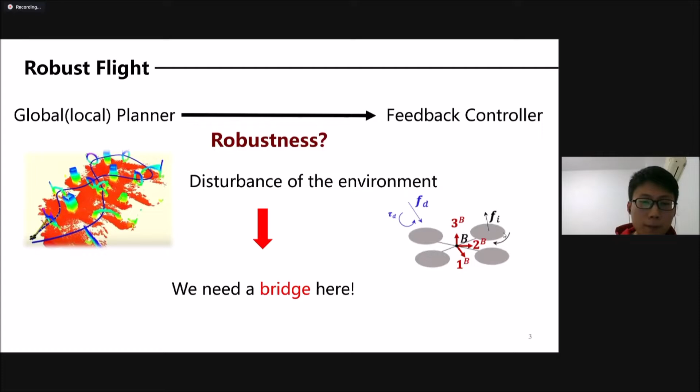However, the planner and controller of a quadrotor are mostly independently designed, making it hard to tune the joint performance under disturbance of the environment, such as wind. So there's a gap between the planner and the controller. To bridge this gap, we propose an efficient receding horizon, local adaptive low-level planner as the middle layer between our original planner and controller. There are 3 main features of our method. Firstly, our method balances tracking accuracy and traveling progress naturally with these disturbances. Secondly, corridor and terminal speed constraints guarantee safety and feasibility. And the third feature is the quadratic programming formulation with less than 5 milliseconds onboard solving time. This makes it run real time on board.

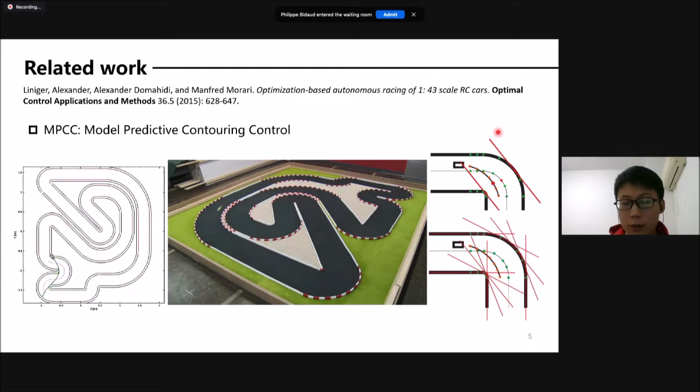Our method is inspired by this work, an application of MPCC as the planner for miniature car racing. The safety constraints are established by modeling linear functions from the boundary of the racing track, just like this. However, such constraints are not directly available for quadrotors in unstructured environments. Now let's see our problem formulation. Given a global reference trajectory, here P(t), we design a retiming function t(tau) to map the original time to the new time variable tau. Then the derivative of t indicates the traveling progress. When it's greater than 1, the drone travels faster than the reference trajectory. When it's less than 1, it means the opposite. We also designed the adjusted local trajectory S(tau). Then the tracking error is defined as the distance between P and S. The objective is to trade off the tracking error and the traveling progress under the safety constraints, which will be introduced later.

After discretization and linearization, we formulate the problem as follows: a typical path following MPC with a retiming variable theta. We model the system as a third-order integrator model. The states are given by x, y, z, theta, and their first and second-order derivatives, v and a. The input is given by jerk, the third-order derivatives of x, y, z, theta. They are discretized by delta t with predictive horizon length n. Thus, the optimization problem turns into receding horizon MPC with a linear state transfer equation here. The objective is nonlinear because of the term P(theta). Thanks to the receding horizon framework, we linearize this term around the optimized result in the last horizon. Thus, the objective function can be represented as quadratic.

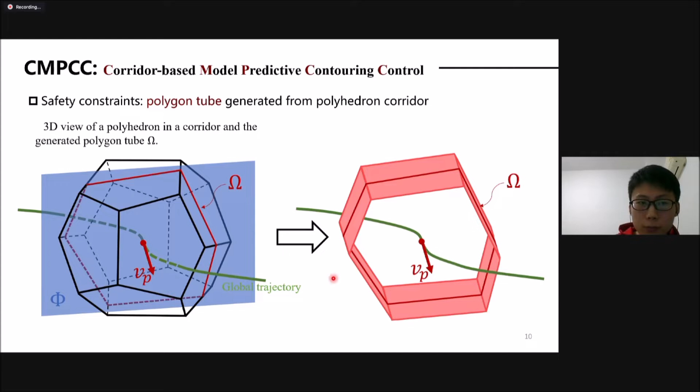And now let's see the safety constraints. A safe flight corridor is a series of connected polyhedrons representing the safe area around obstacles, which is generated during global planning. Leveraging the safe flight corridor, we generate a polygon tube for each state during optimization. The polygon tube is generated as the intersection between the corridor and the normal plane of each state of the global trajectory. And each state at an optimizing time step corresponds to a single polygon tube. Yeah, this is our safety constraints.

Besides, considering the shortsightedness of the limited horizon, we set a terminal speed constraint. Restricting the terminal speed ensures feasibility while significantly shortening the planning horizon.

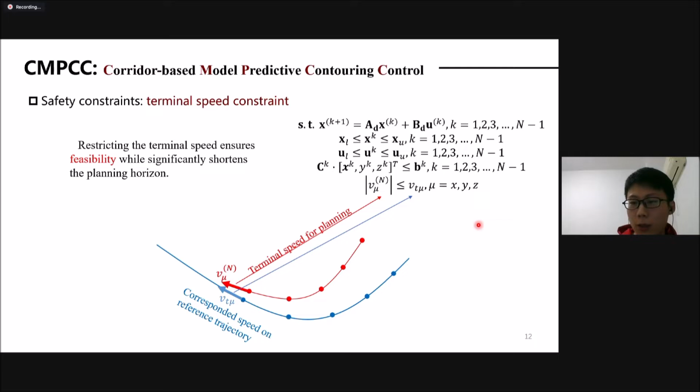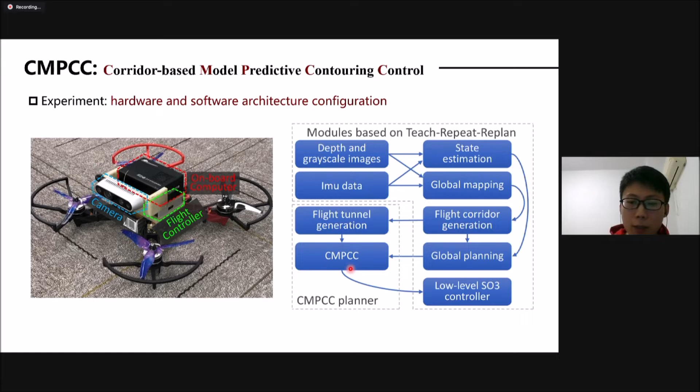Here is the hardware and software architecture configuration of our experiment. We use a self-developed quadrotor with an Intel RealSense D435 stereo camera, and a DJI N3 flight controller for state estimation. All modules run solely on a DJI Manifold 2C onboard computer, and our system inherits the localization, mapping, and global planning from the Teach-Repeat-Replan system.

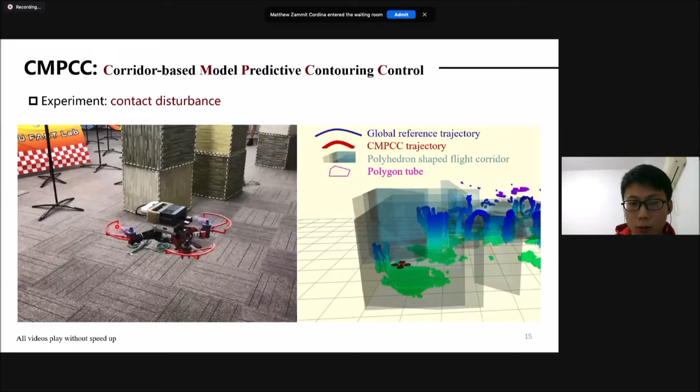And we also apply challenging force disturbance to the drone to test the performance of the proposed CMPCC planner. And here is the top-down view of the experiment. We can see the performance of our planner.

Okay, now let's see the spatial and time profile of the circumstance under contact disturbance. The red line denotes the trajectory of CMPCC. The blue one denotes the global reference trajectory, and the magenta one denotes the trajectory without disturbance. From the left, we can see the deviation occurs near the hit position, but the CMPCC planner soon converges to

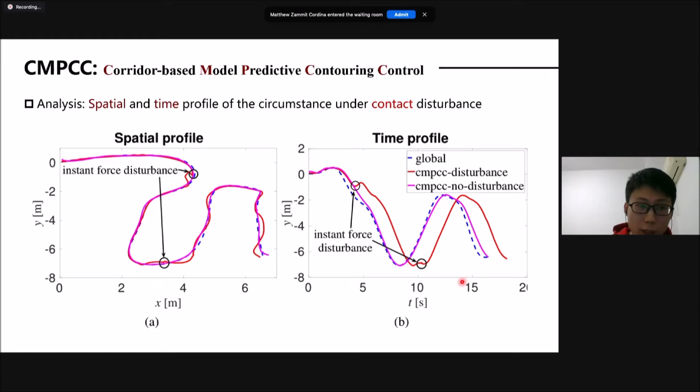the global one. From the time profile, we can see that the instant force disturbance changes the temporal distribution of the optimal trajectory, resulting in the delay of the CMPCC trajectory relative to the one without disturbance and the global trajectory. And here are some more tests. This test shows the robustness of our system.

Okay, thanks for listening. Any questions? Thank you very much. The paper is now open for discussion. Questions? Oh, yeah? Yes. May we have a mic for... Thank you for this very interesting presentation.

My question is, what is the advantage of this middle-level contour MPC over letting the MPC generate its own trajectory by giving all the constraints? I mean, one MPC that actually works as a controller and also as a planner, given all the constraints. Is there an apparent advantage? I think your question is about the corridor constraints. Is there any advantage of the corridor constraints? Is that right?

My question is, is there any advantage of this architecture? You have a global trajectory, then you have this contour controller, then you have a low-level controller. Instead of this, we can also have an MPC controller that can directly generate its own trajectory. So what is the advantage of your architecture over this?

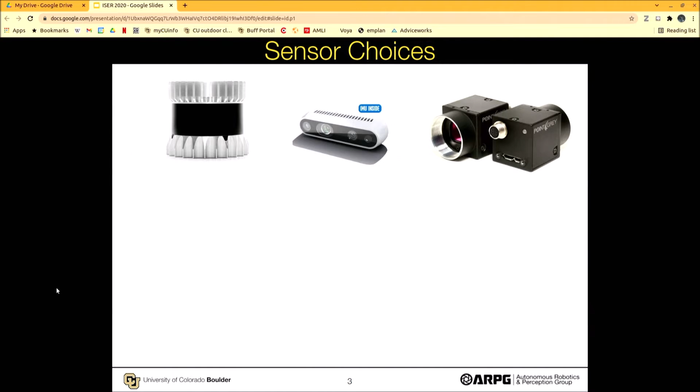LiDAR and vision are commonly employed in achieving localization, mapping, and higher level perception problems. Depth cameras, GPS, and inertial measurement units are quite popular as well, and these work fantastically when conditions are favorable for them, i.e. when the air is clear, when ambient light is plentiful, and in the case of GPS, when there is an unobstructed view of the sky. But when conditions aren't favorable, methods based on these sensors tend to degrade pretty quickly.

For example, this video shows the same space we saw earlier with a robot using the same sensors and algorithms we saw in the first video, but now the space is filled with dense fog. We can see the VIO estimate jumps around a lot. It's not quite sure where it is. And the occupancy map is filled with erroneously occupied cells. And these challenges aren't just found in lab spaces with fog machines either. For instance, robots in search and rescue missions in built and natural environments often face challenges from these so-called visual degradations.

So this presentation is going to be organized as follows. We've already gotten past the introduction, but next up I'll go over a few bits of related work, and then I'll discuss my methods for radar-based state estimation and then radar-based obstacle detection. And I'll lastly demonstrate the two systems working together and present a couple of conclusions and directions I think would be useful for future work.

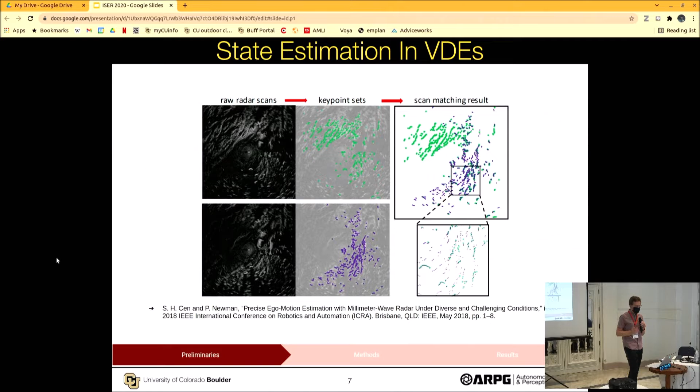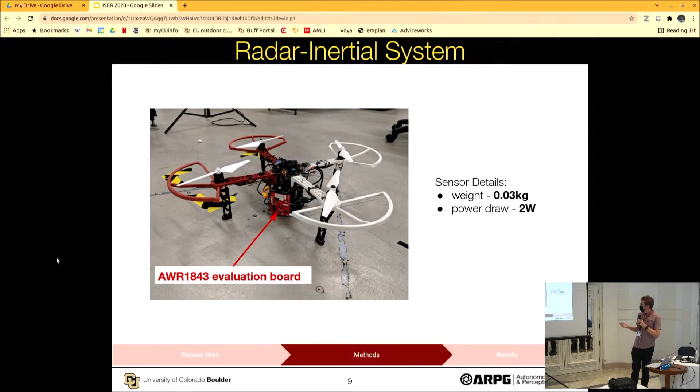The work I'm presenting is designed for a three-dimensional environment, and it uses lightweight and low-power radar on a chip paired with a MEMS IMU. In this image, we can see our sensor rig mounted on a small quadrotor drone, along with an Intel NUC computer for onboard compute.

As I mentioned earlier, this project has two components, state estimation and obstacle detection. I'm going to discuss the radar inertial state estimation method first, and then proceed to obstacle detection a bit later. I used a Texas Instruments AWR radar sensor, which is pictured here. It returns targets parameterized by their range, Doppler velocity, and azimuth and elevation angles.

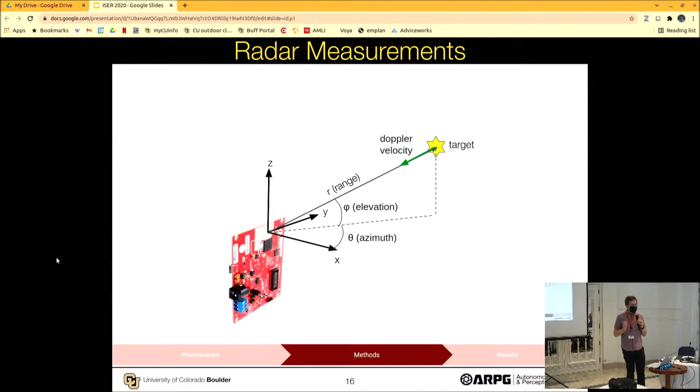Now, if I assume that the sensor platform is moving and all of the objects in the scene are stationary, then the velocity of objects in the scene relative to the sensor has the same magnitude but opposite direction as the sensor's velocity. An object's Doppler measurement is the projection of that relative velocity vector onto the ray between the sensor and the target. So if we have Doppler measurements of many targets distributed throughout the scene, we should be able to regress the local frame velocity of the sensor platform.

That's reflected in the Doppler sensor model that I'm using, where the true radial velocity of a target is the dot product of the local frame velocity of the sensor and the unit ray between the sensor and target. Now, it would be possible to use this model alone to estimate the sensor platform's local frame velocity at a single time step, but radar sensors, especially the lightweight automotive type ones that I'm using, tend to be quite noisy, so single time step velocity estimates from radar alone tend to be fairly noisy as well.

That's why I actually jointly estimate the system state at several time steps using IMU measurements to constrain the change between adjacent states, as we can see in this factor graph representation of my system. I estimate this state vector, which includes the robot's global frame velocity, its orientation, and also the gyroscope and accelerometer biases. I estimate that by optimizing the cost function shown here, which includes a Doppler factor and an inertial factor over a sliding window of k successive Doppler measurements.

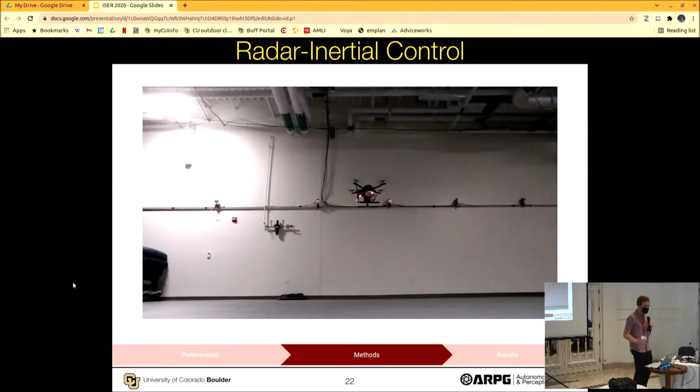Clearly the state estimates the MAV is getting aren't perfect, but they are accurate enough that the MAV is able to take off and hover in place for at least a short time with minimal drift using only the radar inertial velocity estimates as feedback.

Now, the second component of this project is the usage of radar for obstacle detection. Occupancy mapping is commonly used for obstacle detection tasks, but using radar for occupancy mapping can come with some significant challenges. Firstly, commonly available occupancy mapping packages, such as the one provided with ROS, assume a beam sensor model where rays are cast from the sensor to each point in a scan, and the occupancy probability for a cell in the map is increased if the cell contains a ray endpoint and decreased if it's traversed by a ray. But this is a problem for radar because radar doesn't cast a discrete set of rays. And it also might have detections at multiple points along the same ray.

So to address this, I modified the ROS Octomap package with a volumetric sensor model in which the occupancy probability for a cell is simply increased if it contains a radar return and decreased if it doesn't contain a radar return but is still within the sensor's field of view. Even with this modification, though, we run into a fairly large challenge with radar-based occupancy mapping, as demonstrated in this video.

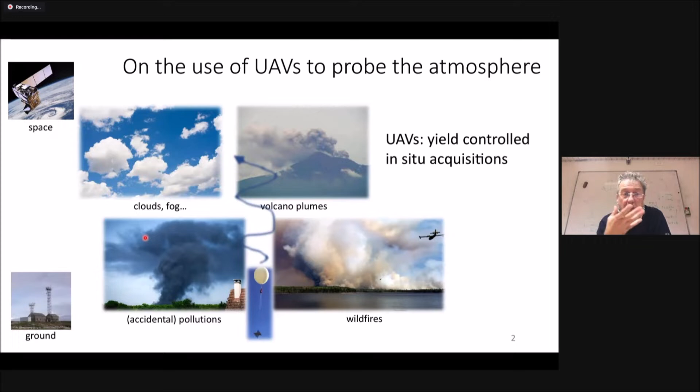valuable to gather data. And most of the data we have on such phenomena are remote data coming either from satellites or from the ground. There are some in situ ways to gather data, with balloons, but they are not controlled. UAVs, with respect to all these ways to gather data, have many advantages. They gather in situ data, and they are able to be controlled, so to gather relevant data for the

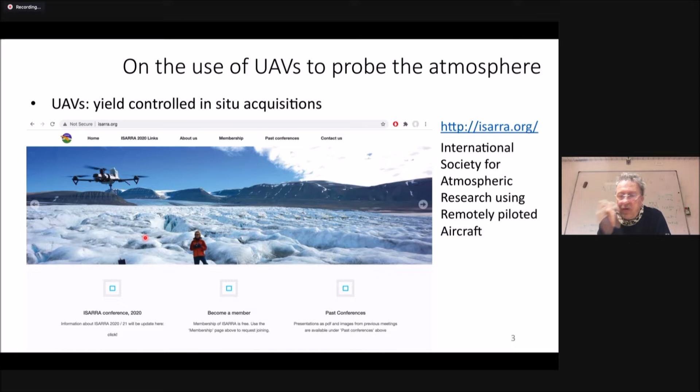purpose at hand. And this has been known and observed by the atmosphere scientists for long, and they have a scientific society which gathers something like 100 atmosphere scientists who use drones, and they gather once a year in specific places to exchange on what they do. But these guys are not roboticists, and they use drones the way they buy them. And there is definitely a lot of interest in developing further processes to explore such phenomena.

And one of the most interesting things is the ability to deploy fleets of UAVs to gather denser data, to gather more data, and of course, synchronized in time. And this is true whatever the purpose is, be it for scientific purpose or for operational purpose. Probing the system with more data yields better observation and better prediction, of course.

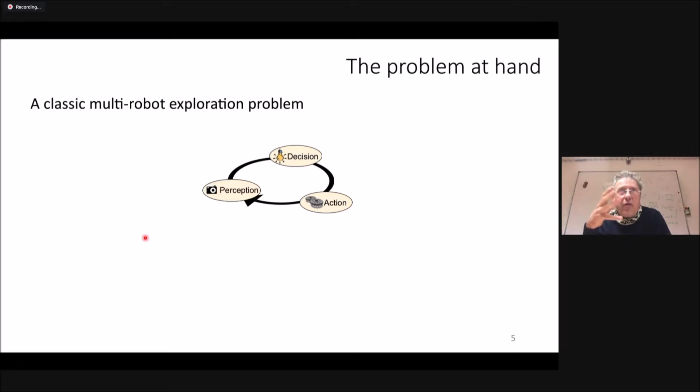So you may think, okay, it's a classic multi-robot exploration problem. I build a map, I find where my map misses information, and then I decide to go there. The thing is that these environments are so different from any usual robotics problem that it's definitely not a classic multi-robot exploration problem, especially from the mapping point of view. I'll say a few words about this. I will present the objective of a specific project, very briefly some elements of solution, and I will insist a little bit more on some experiments we carried out 2 years ago and draw a few lessons.

First of all, our colleagues, atmosphere scientists, are really interested in understanding what's going on in cumulus clouds. And there is even a scientific controversy in the community as to what exactly happens in there. The microphysics is well understood, but the global phenomenon, the so-called entrainment and detrainment, where the cloud gathers some water inside and water goes out of the cloud, is not well known. And everything that is interesting actually happens at the interfaces between the cloud and the atmosphere.

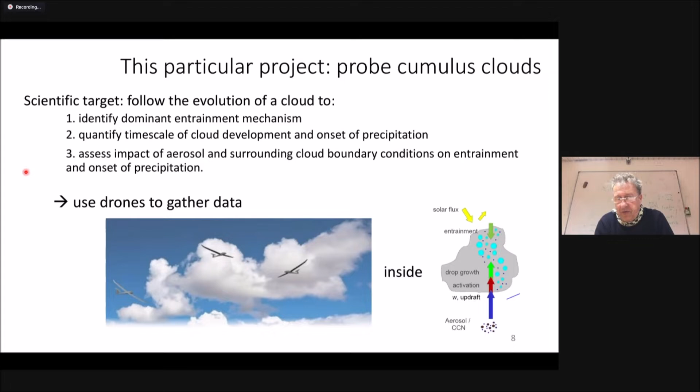And so discussing with them, they really specified some things they want to do. They would like, for instance, to map horizontal sections, and do this with 2 UAVs in a synchronous manner at 2 different altitudes, so as to estimate the volume of water that is going high in the cloud.

They are also very much interested in perceiving what's going on at the interfaces. And for this, they are interested in a series of variables, so pressure, temperature, humidity, liquid water content, aerosols, and of course wind. I mean, these phenomena are very windy phenomena. The wind drives the phenomenon, and the phenomenon itself, the physics itself, also generates wind.

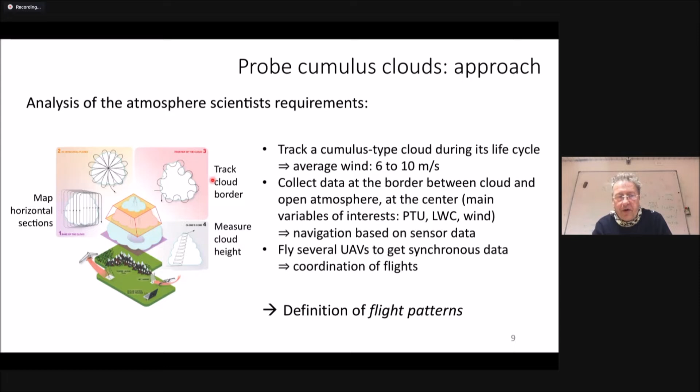And so with them, we have defined what we call flight patterns, basically to answer this kind of high-level task, like measure cloud height, or track the cloud border, either to get some data to measure its diameter, or map horizontal sections. And so the flight patterns we have developed are quite simple. They basically exploit a sensor that tells the system whether it's in or out of the cloud.

And doing a simple kind of bang-bang control scheme, we can drive a UAV so that it goes along the border of the cloud. We can use the same sensor that is able to perceive the transitions, the cloud border, to define some horizontal mapping scheme of a section of the cloud. There is one little point which is important here, the estimate of the cloud center of mass, which can be obtained thanks to building maps.

So I will just say a few words about building maps of clouds. So basically the sensors we have have no look ahead. We don't have LiDARs, we don't have cameras. All these are totally useless in clouds. We only have sensors that perceive data where the drone is. And we are trying to map a dynamic 3D phenomenon from data that are gathered along trajectories, say 1D manifolds. So it's a highly uninformed mapping system.

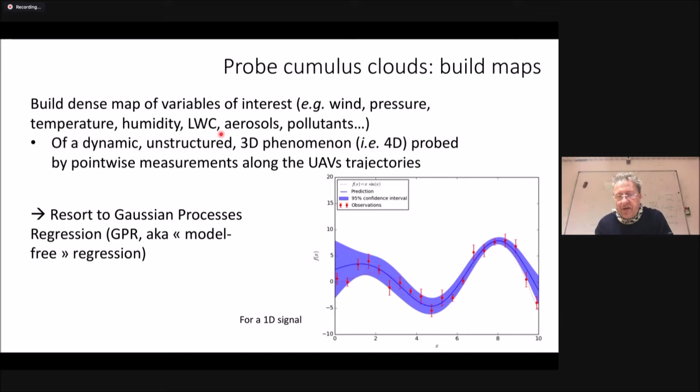But there has been some work in the literature, and we have pushed a little bit, to resort to Gaussian process regression to extrapolate data, inserting some knowledge, since it's naturally model-free GPR, some knowledge on the regularity of the cloud or its size, for instance.

And this here shows a few illustrations, say with just one UAV, one black dot here with one data, at time T1, we can predict that the cloud is like this. And after having made these trajectories, we can complete a map. And a very good thing with GPRs is that it does provide an estimate of the quality of the map.

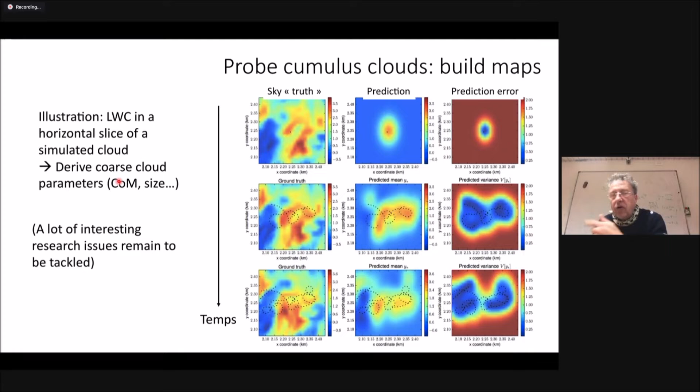But from this, in this project, for now, we only derive some very coarse cloud parameters so as to drive the flight patterns that go, for instance, along the border of the cloud. The overall thing is integrated with a system in which the users play a large role. I will come back a little bit to this later.

So here you see one UAV not flying very high. This is the map. I think on the left it's the map, maybe on the right it's the cloud ground truth, the simulated one, on the ground control station.

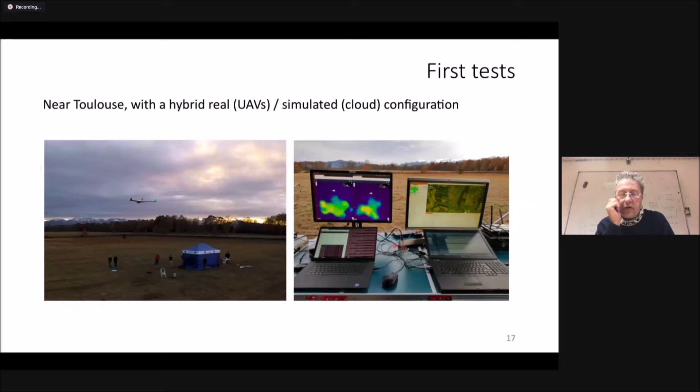But then we moved to Barbados in early 2020, almost 2 years ago now. So why there? Not because it's a sunny place, but because it's a windy place actually. Because this is the most eastern island of the West Indies, and as such it's the first to encounter the winds that come from the east, from the Atlantic Ocean. So all the phenomena behind are already perturbed by Barbados.

And so this is why we decided to go there, and also because we joined a huge experimental campaign from atmosphere scientists. They used manned planes, other big UAVs, satellites, boats, to gather some data, and so we took the opportunity to participate in this campaign.

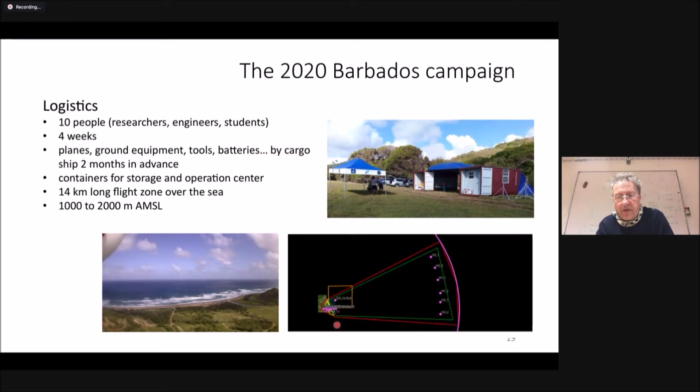There's of course quite a lot of logistics, so it required all in all nearly 10 people during 4 weeks. Everything had to be shipped beforehand. On the flight, so this was our playground. Basically, we took off from a green area close to the beach. We are looking eastward here. This is the flight zone that was allocated to us, 14 kilometers long. And the strategy, well, I will say later about the strategy.

Very interesting is the place of the humans in such experiments. First, we have the atmosphere scientists that are here to say, okay, I want this, I want to map this, I want the UAV to move up at this elevation and so on. So they basically task the fleet, they give the commands.

We have a guy that supervises the map making software. We have a UAV operator behind the screen who monitors the flights, battery levels and so on. We need a safety pilot to handle, well, basically takeoff and landing. And we have an overall flight director. So all in all, for just one UAV or two UAVs, a very small fleet in the air, it requires at least 5 people.

The airframe is a commercial one, an easy one, equipped with classic pressure, temperature, humidity sensors, and a specific sensor, which you see here in the insert, which is able to measure the liquid water content in the cloud. We used long-distance serial modems, and we flew the Paparazzi UAV autopilot.

For this kind of thing, robustness is key. You don't want to spend time on the terrain repairing your UAV. So even though we had conceived a high-end Formula One UAV able to fly 3 hours, we decided not to fly it because it was way too fragile. The flight strategy was basically to take off, move away eastward, and set the UAVs in waiting patterns so that when the cloud comes, they detect it and they track it back to the beach.

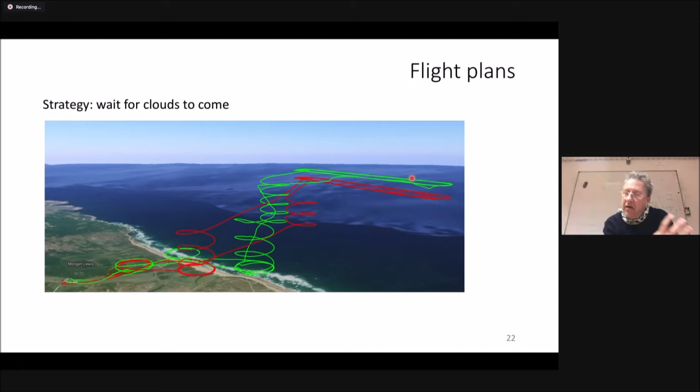So a little bit more precisely, each flight plan consists of a sequence of steps: taking off, wait, raise, and then put in the waiting pattern. And once a cloud is detected, thanks to the liquid water sensor, we trigger the sensor-based adaptive flight pattern. And in this case, we were only able to try the patterns that track the cloud border.

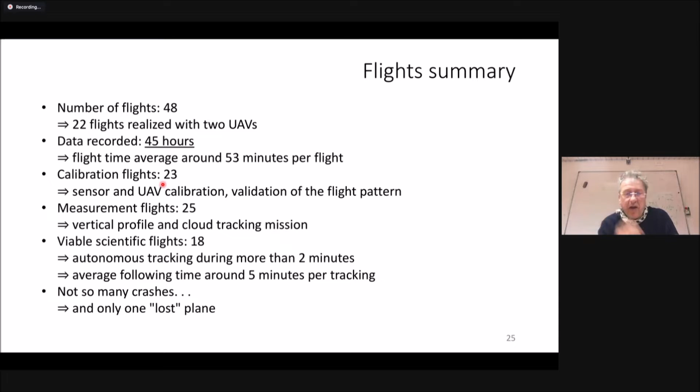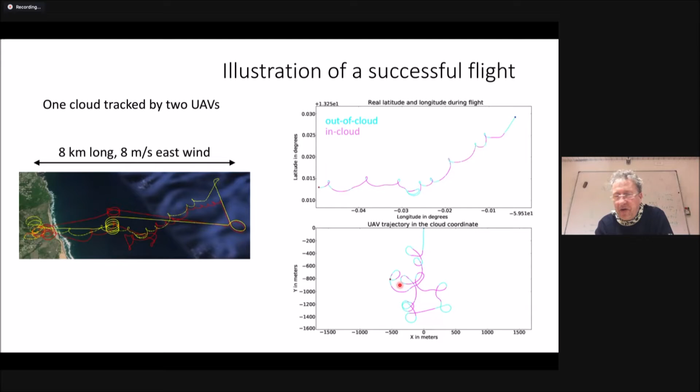So what you can see is that the cloud is not a round shape, or a square or whatever. It's always a very complex shape. And thanks to this, our colleagues from Météo France said they could derive some very interesting scientific results, which I won't develop here, and I would not be able to develop them very precisely, but they were extremely happy with the data, and they say it's the first time in the world that we have such data, with only 2 UAVs.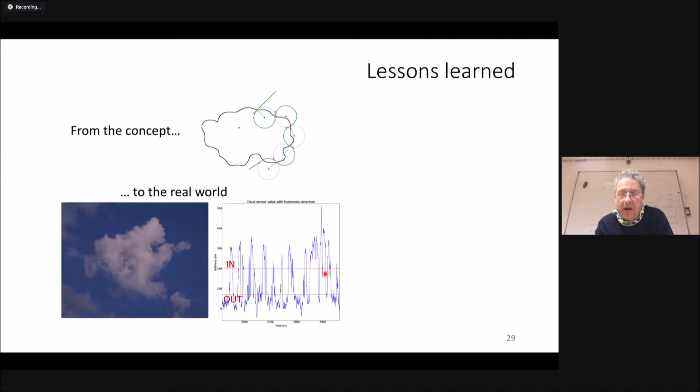So now the lessons learned. Well, everyone in this conference knows there's a huge difference from a concept drawn on a table to real life. This cloud is a particularly vicious one, I should say, because it has definitely not well-defined contours. But even in the big clouds you see in the sky, their contour is always like this. The sensor is very noisy, there's a lot of hysteresis effect, and this is the raw data from the liquid water sensor that tells us whether we were getting in or going out of the cloud. So life on the terrain, or in the air, is really different than in the lab.

A few points. Well, of course, logistics is an issue. We lost too much time finalizing the preparation of the UAVs. And in the end, we could only have 2 UAVs at the same time. So that's quite disappointing.

We had 5 UAVs on the ground, but we have never been able to take off even 3 UAVs because of some sensor hardware failures, and also because of a somewhat poorly thought-out overall system, because the operator and safety pilot workload really becomes huge when you have several UAVs in the air.

Of course, searching blindly for clouds is inefficient. So I mentioned vision is totally useless to map a cloud, but when you're outside the cloud, to estimate its distance, its shape, its size using classic vision algorithms, it is possible. And this is definitely on our very next agenda, to be able to locate clouds and not wait for them blindly. About the tracking system also, because the contour is not well defined, we have now defined an automatic recovery system to retrieve the cloud when it loses it.

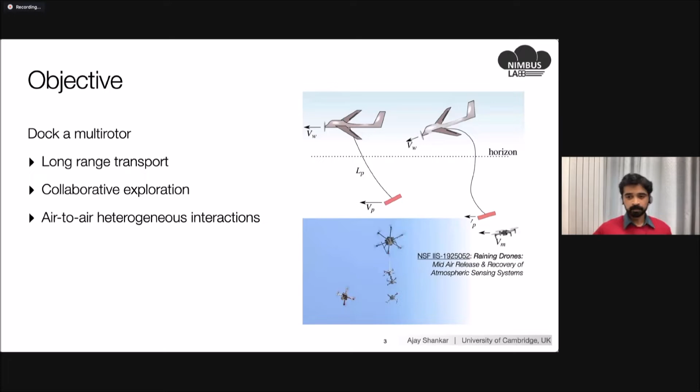What we are looking for, however, in this work is to be able to plan trajectories and intelligently plan them to optimize certain metrics and such. And one of the key factors in multirotor docking is that the trajectory planning must consider interaction effects. As you approach another aerial vehicle in flight, you will be in the downwash of the other vehicle, and if your trajectory planner can account for that, that is favorable.

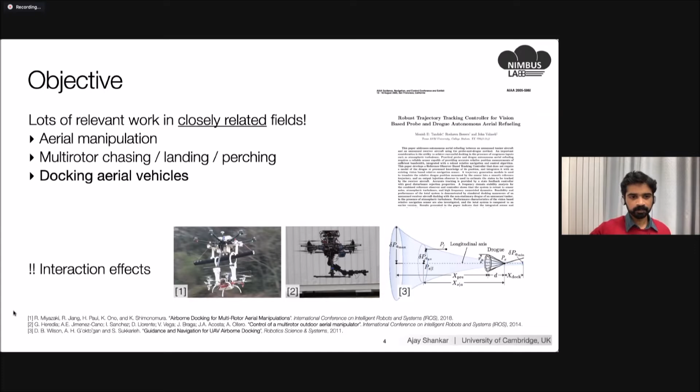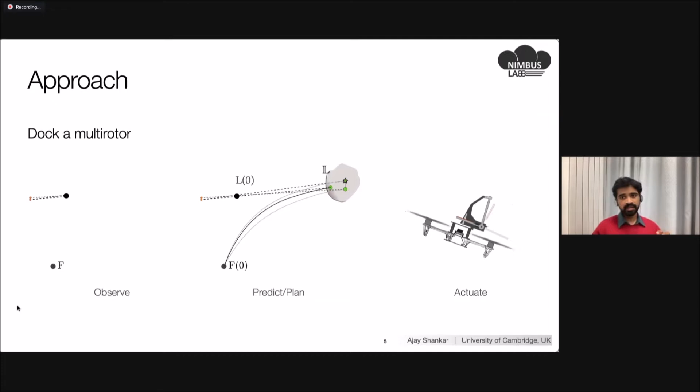So our approach to solving this problem is split basically into 3 parts. The first phase essentially is to observe the trajectory of a leader aircraft flying, as we assume, in a straight line. And then in the second stage, we plan these trajectories towards a predicted final location at a finite time horizon. And then at the end, we execute these trajectories using highly agile closed-loop controllers and a manipulator that's mounted on top of the vehicle. I will explain each of these very briefly in the following slides.

But the main focus, as I said before, is on this idea of trajectory planning and intelligent trajectory planning. And as you can see in this animation that is going to loop here, the leader aircraft, we assume, is flying in a relatively straight line with a constant velocity. And the follower aircraft observes it for a while, plans its trajectory to dock with it in the future, and executes that trajectory. Now, the reason why we want to think about planning is actually something that I mentioned before as well.

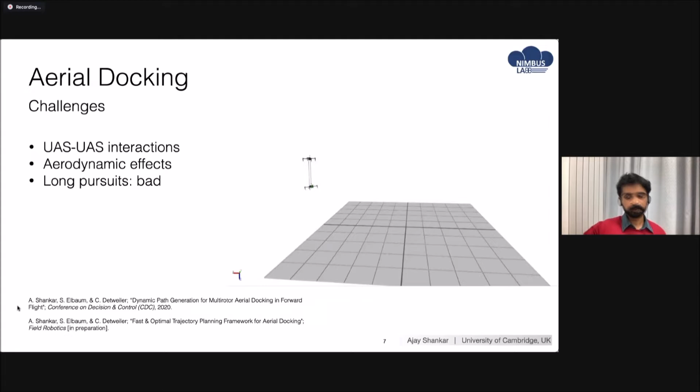The flying in close proximity introduces air-to-air interactions between two multirotors. There will be aerodynamic downwash effects as you get close to the docking point, which you must at some point. And finally, this points to the idea that chasing another vehicle for a long period of time is probably not favorable. And so we look at this problem from the perspective of a trajectory planning problem.

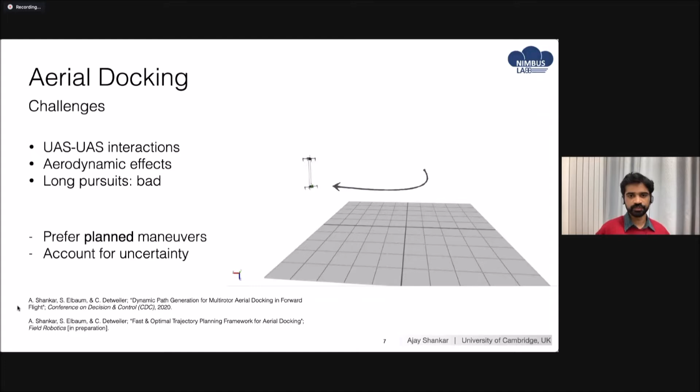And the idea for trajectory planning, as I mentioned before, is to not only plan intelligent trajectories that optimize certain metrics, but also account for uncertainty in the estimate of the leader. As I mentioned, when we do these experiments outdoors, there's going to be noise, and we can assume that the leader is flying in a relatively straight line, but there are errors in estimation. And therefore, we go back to this original animation where we have made these assumptions, as I stated before, and we plan this trajectory.

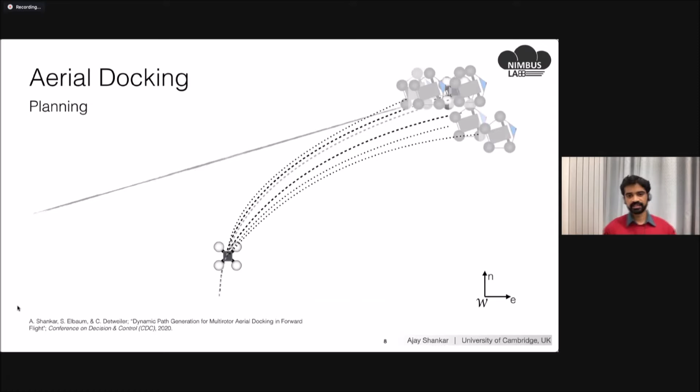One of the defining factors of our work is that the trajectory planning is relatively fast and can be done entirely on board. We can evaluate hundreds of trajectories in less than a second, and that allows us to keep multiple trajectories as a library and select them on the fly as our estimates for the leader change in the future.

The prediction part is something, as I've shown in this picture here, from the top-down view. We assume that the leader is carrying a towed docking platform, as you can also see in the picture here. From the top-down view, it may look like a straight line, but from a vertical perspective, our actual setup tends to sag in the middle wherever the weight is. And our platform currently has a GPS sensor mounted on it and also has a visual tag on it. And the follower vehicle observes both of these data points and fuses them optimally.

The sensor fusion is essentially done through a standard Kalman filter, but the actual estimation and the prediction is done through a least squares regression method, as you've seen here. And the lateral plane estimation is done as a straight line, and the vertical plane is estimated as a quadratic polynomial here.

Then the planning method that we propose is also taken from some of our prior work, in which we propose a multi-objective cost function, and we use variational minimization principles, and we basically borrow techniques from variational calculus to construct these trajectories. In this particular work, we drop some of the terms from these equations and simplify them to a base case scenario where the trajectory minimization is a single functional minimization problem. And it essentially boils down to an energy optimal trajectory in this case.

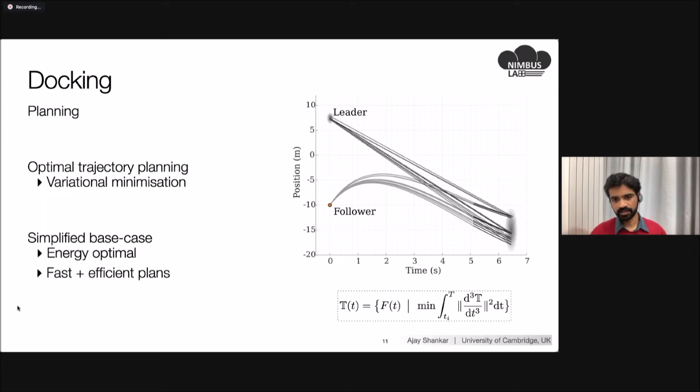For the actuation part, implementing the actual docking, there are two parts to this. First, we require a high fidelity and high precision flight controller that can work outside in realistic conditions. And for this, we use Freya, which is part of our prior work as well. And this allows us to fly efficient, high speed and agile trajectories outdoors in practical conditions as well. And then for the actual docking part, we developed this really fast actuated servo system that docks with the leader platform as it makes even the tiniest contact with it, essentially.

And as I promised earlier, the actual docking experiments with the moving platform are also done under varying operating conditions outdoors. And we emulate this leader platform moving at different conditions. And the entire computation, estimation, and planning is done on board the quadrotor.

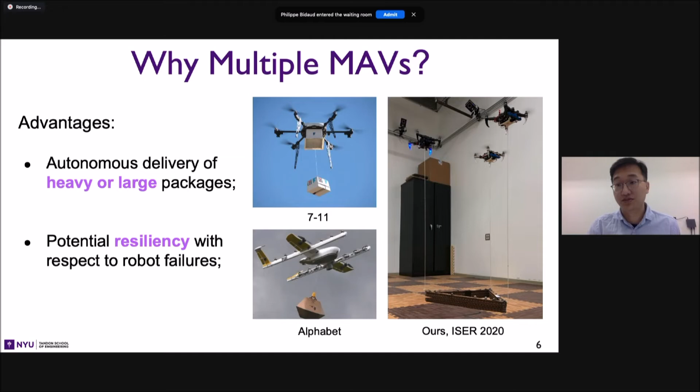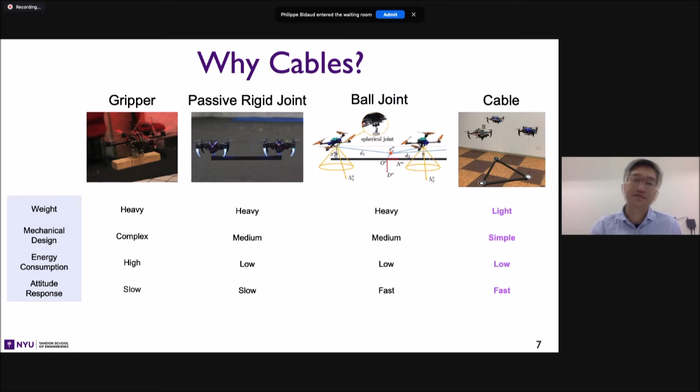Also, compared to an active gripper, it doesn't require an extra actuation mechanism, so it doesn't require extra energy to actuate it. And in general, compared to a rigid connection, it provides faster attitude response as well. So now I'm going to present the technical approach of this research.

And then the robot controller will take this desired value and then take the local information of the cable direction and cable direction velocity, as well as the robot's own orientation, to decide the thrust and moment that it wants to exert on itself, and then further affect the payload's motion. And then the state estimation is all being done in Vicon to provide real-time feedback to the controllers.

So as you can see, this is a very complicated system. It has so many states that we'd like to control. So first of all, for the payload, since it's a rigid body payload, we would like to control its position, velocity, as well as the orientation and angular velocity as well.

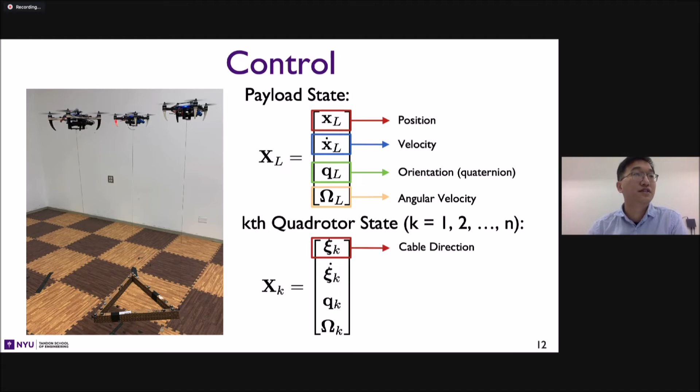And for each individual quadrotor, it also has several states that need to be controlled. First, it's the cable direction and the cable direction velocity, and then the orientation of the robot and the angular velocity of the robot as well.

So first of all, let me talk about the payload controller. So the payload controller essentially just takes the desired position, desired velocity and acceleration of the payload as an input, and then takes the payload's position and velocity as feedback to generate forces to maneuver the payload in 3D space.

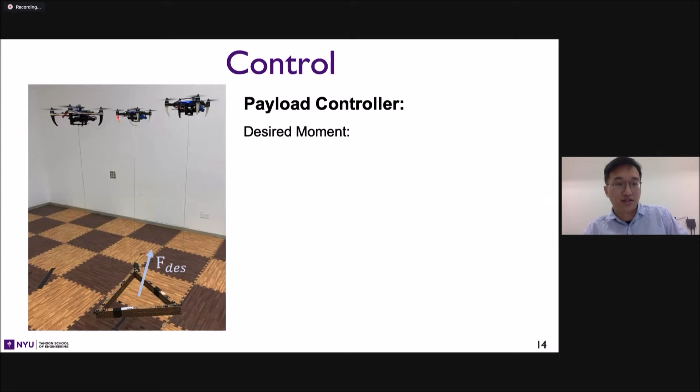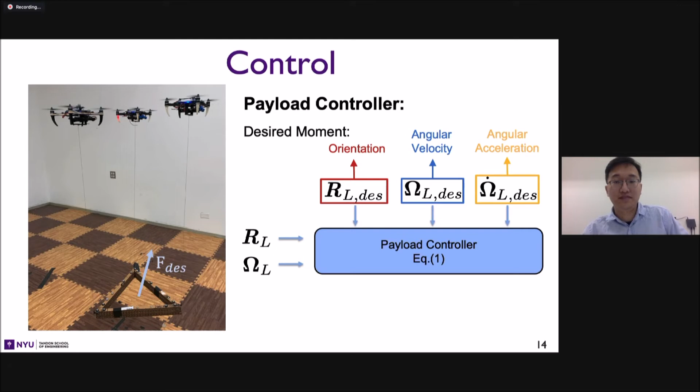And then for the orientation motion, it will also take the desired orientation, angular velocity, and angular acceleration as input, and take the orientation and angular velocity feedback from Vicon to generate the moments to maneuver the payload for orientation as well. So now the question will be, once we have the desired force and moments to maneuver the payload, how do we distribute those force and moments into individual tension vectors that belong to each robot?

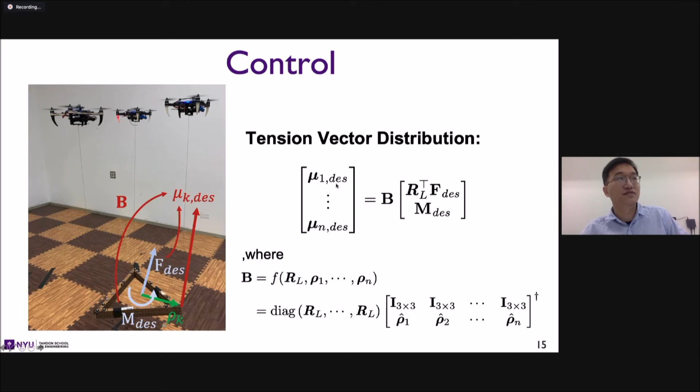So essentially we use the distance vector from the attach points to the center of mass of the payload, as shown in this green vector here. This is essentially just the geometric information of the payload. And then we construct a B matrix. Actually, you can see here, it involves the payload orientation and also the distance vector of all the attach points. And then, using this B matrix, we map the desired force and moments into individual tension vectors. So now each robot has its own tension vector in 3D space.

So now the robot needs to decide what's the thrust and moments that need to be exerted on its own. So each robot takes the desired tension vectors, and in addition, the desired acceleration at the attach point, which can be obtained from the desired trajectory of the payload and also using the geometric information.

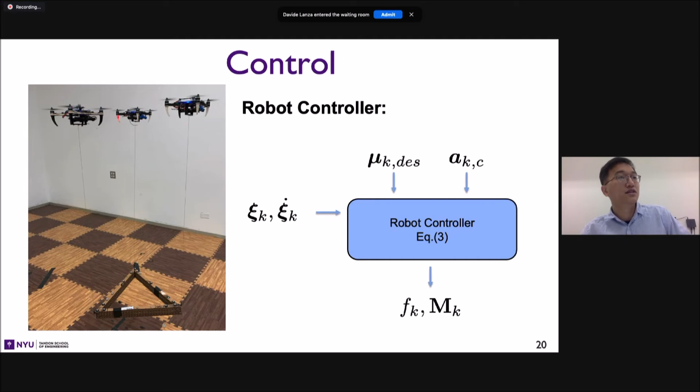And it will just estimate its own cable direction and cable direction velocity, and also its own orientation and angular velocity, as feedback to the controller. So it doesn't essentially talk to other drones to decide its own thrust and moment. So then the thrust and moments are being exerted on the robot and then further maneuver the payload.

So now let me talk about experiments. So first we did a step response experiment using different cable lengths. The purpose of this evaluation is that we would like to investigate the relative mobility between the robot and payload and the system response with respect to the mechanical setup in the system, in this case, our cable length.

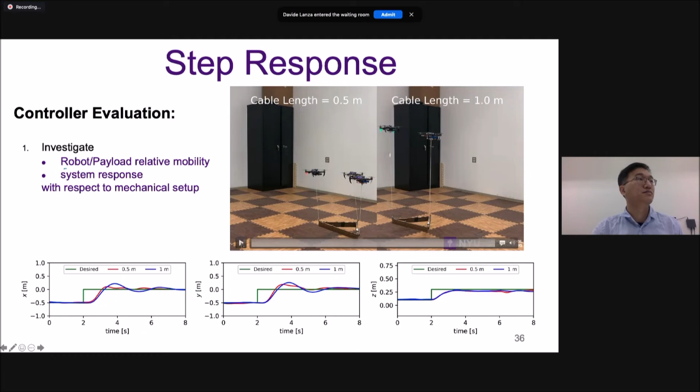So as you can see in this video, first we did a step response in Z direction, and then step response in Y and X direction. So actually, as you can see in the video and also in the plots here, for X and Y direction, the shorter cable actually responds faster than the longer cable. And also the longer cable case oscillates around the desired value more than the shorter cable.

So this is sort of our insight in this kind of system, that actually a shorter cable can provide faster system response. Another thing that's worth noticing is that the cable length doesn't affect the step response in Z direction at all. So this also makes sense because in the controller, for the Z direction, the cable length doesn't affect the thrust magnitude.

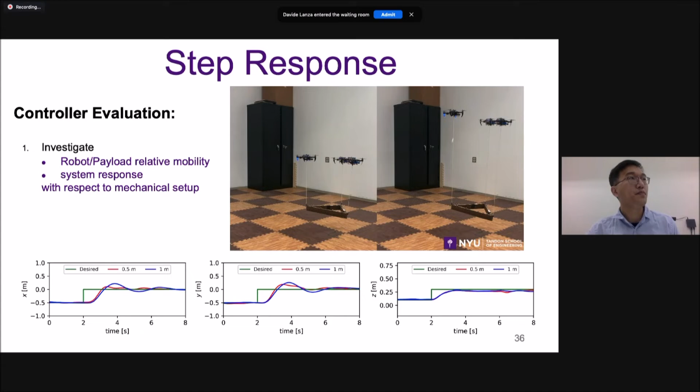So we have some extra time, I think just 9 minutes now. So I also would like to introduce a little bit about our recent development that was accepted in an RA-L paper last year. In this paper, we developed a fully onboard state estimation method that replaced the Vicon in the previous ISER work. So this entire system is now fully autonomous using onboard sensing only.

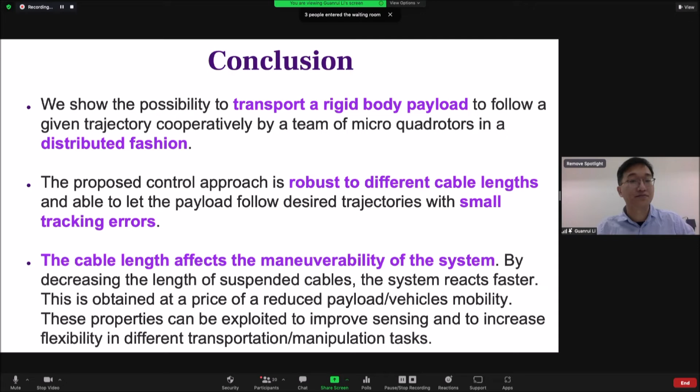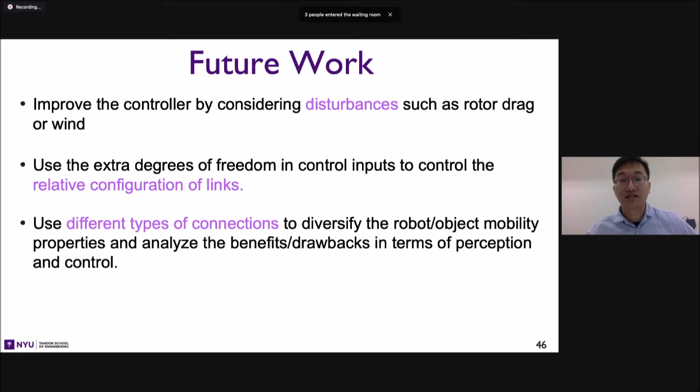Some future works could be improving the controller by considering disturbances, and using the extra degrees of freedom in the control inputs to control the relative configuration. We're also interested in exploring different types of connections to diversify the robot-object mobility properties and analyze the benefits or drawbacks in terms of perception and control. Another interesting direction would be estimating the payload's geometric and inertial parameters using onboard data only.

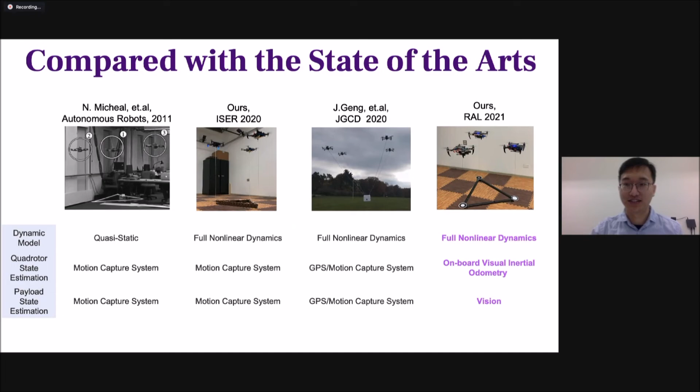So basically, yes. In general, the complexity is with respect to the computation itself, not the other kind of situation. I don't know if this answers your question. Yeah, okay. So you solve the problem in one drone and then you send the command. Okay. Thank you. Thanks a lot again, Guanrui. We will catch up later in the discussion.

Yes, thank you. Last but not least, we have the sixth paper of the session by Mika Kora. Are you online? Yes, very good. I thought that Baxter was Rodney Brooks' robot with Rethink Robotics, but apparently BAXTER also stands for Bimodal Aerial Terrestrial Hybrid Vehicle for Long Endurance Versatile Mobility. Please. Yeah, I guess now it does. Can you hear me? Yeah.

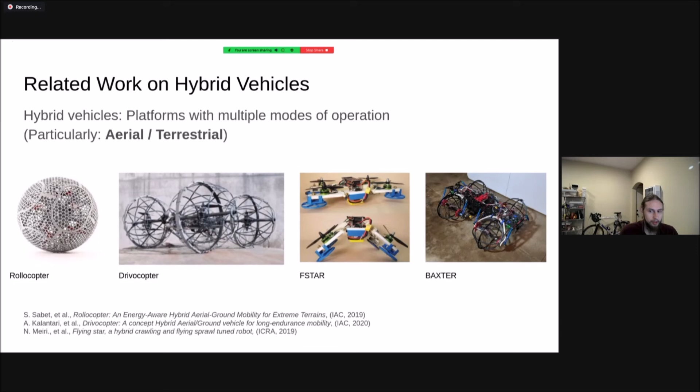One way to classify these hybrid aerial vehicles is by the type of drive system. Systems based on a passive drive, like the Rollocopter, rely on thrust from the rotors to move about on the ground. However, the rest of the systems shown here have active drive systems and move about more like typical wheeled vehicles. Generally speaking, passive drive systems are often more simple than active systems, while active systems may have more efficient terrestrial mobility. Additionally, passive systems based on a shell design like the Rollocopter may have a much larger footprint than other comparable platforms.

We can also classify hybrid platforms in terms of morphing geometry, that is, whether and how the platform geometry changes during operation. We consider both the Rollocopter and Drivocopter as non-morphing, as the geometry does not change substantially aside from the rotating components. F-Star is active morphing due to the use of actuated arms to transition between aerial and terrestrial modes. Last, we consider Baxter to be passive morphing due to the suspension system on the wheel and thruster modules. In this case, the non-morphing systems are predominantly mechanically simple, while active and passive morphing systems each have their unique complexities to achieve their function.

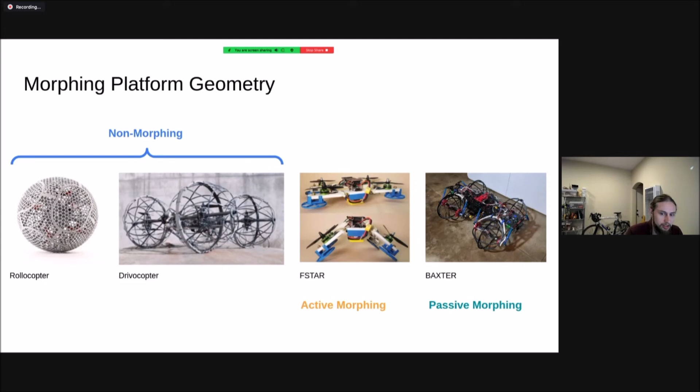Baxter itself is also the product of an iterative design process. The iterations improve on payload capacity, sensing and compute payloads, and resistance to impacts. On the left, Tumbler is a small hybrid platform with a passive terrestrial mode, like the Rollocopter. HexWing is a larger wheeled platform with active mobility and bears some similarity to Drivocopter from the previous slide. And Baxter, of course, is larger still and features more advanced suspension and drive systems. Now I'd like to briefly show off some videos of these two older generations.

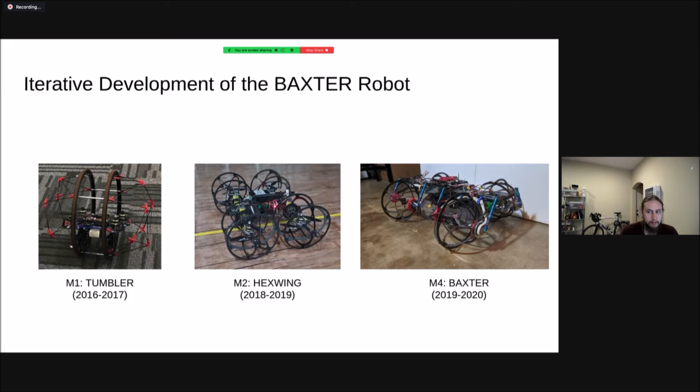So first, I would like to look at the Tumbler platform, and here we can see both the passive terrestrial operation, so powered by the thrusters, as well as the system in flight, as we can see here. And I'll let this go on for just a few more moments. So again, this is a very small drone inside a larger cage.

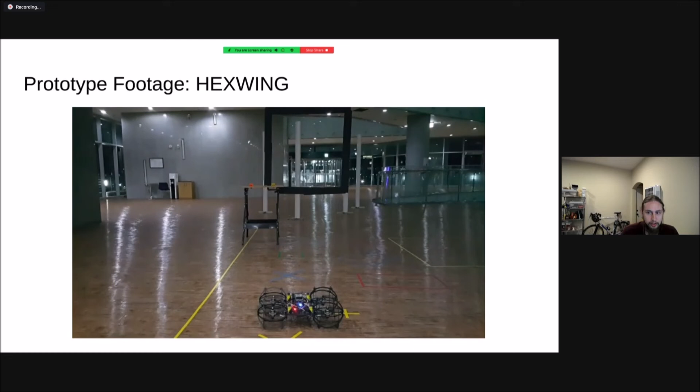So here we have the HexWing in an obstacle course. And so we'll be able to see how this platform can navigate a wide variety of mobility challenges. HexWing is manually controlled, so the precision in flight is somewhat limited due to use of a human operator. When I show videos of Baxter later, that will be under autonomous flight, unlike this system. But still, we're able to navigate the obstacle course.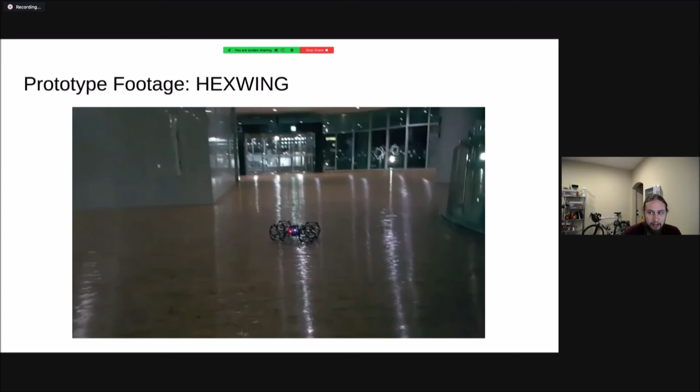So as I hinted at earlier, the successive generations of these hybrid robots generally seek to improve resilience and payload capacities toward increasing the scope of the sensing and computation payloads each is able to carry, as well as the general autonomy of each platform.

So Tumbler sits on the left, a small robot that carries little more than a flight control board. Then increasing scale and adding wheels, we get Hexwing, which now carries a Jetson TX2. And then the Baxter system I am presenting today is 2 kilograms larger, almost twice as heavy, and so introduces a suspension system to improve resilience to impacts. And this system has a much more complete autonomy payload with both a Jetson and a RealSense T265 for visual inertial odometry.

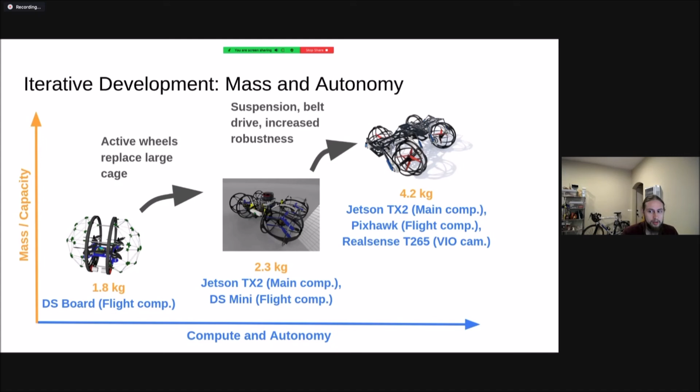And so Baxter presents a hardware-oriented approach to improving endurance, versatility, and autonomy. In the following slides, I will focus on key features such as the suspension system, which works alongside the belt drive. And these together enable development of behaviors such as landing with non-zero velocity. So again, I'll be presenting on the suspension system, the belt drive, and the landing process, each in turn.

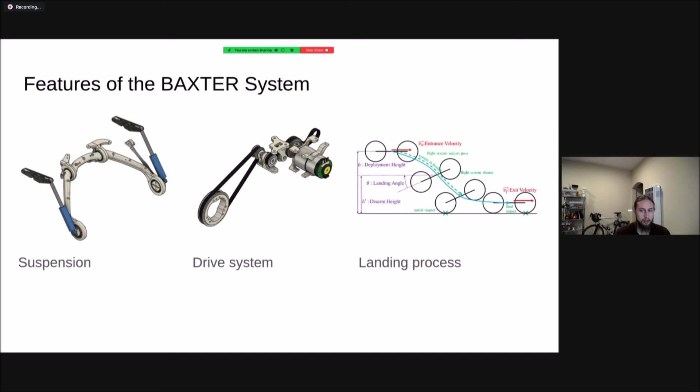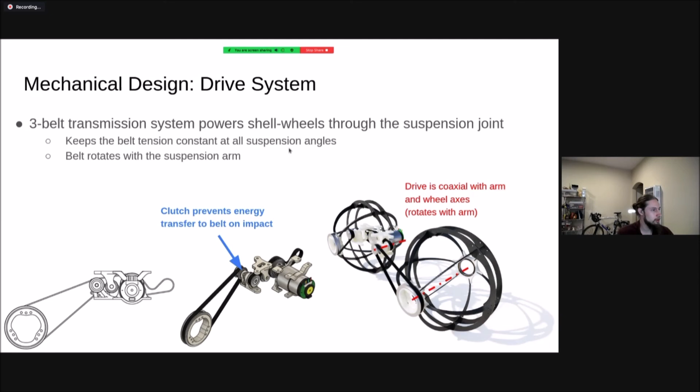I don't know what happened to this video. So there was supposed to be a video here showing off the suspension system, but right now it's not loading. I'm going to reload the presentation quickly. It was showing the earlier videos, but it's not showing videos anymore. Can you see this video now? Yeah, sure. Awesome. Okay. I don't know what happened there. Always something.

Moving on, I'd like to briefly highlight the 3-belt drive system. In the terrestrial mode, Baxter is driven by 2 DC motors, one on either side. So the belt drive serves to transmit power across the moving suspension. So on the right, I have emphasized that the intermediate axis of the drive system is coaxial with the axis of rotation of the arm. And so the belt and suspension system will rotate together.

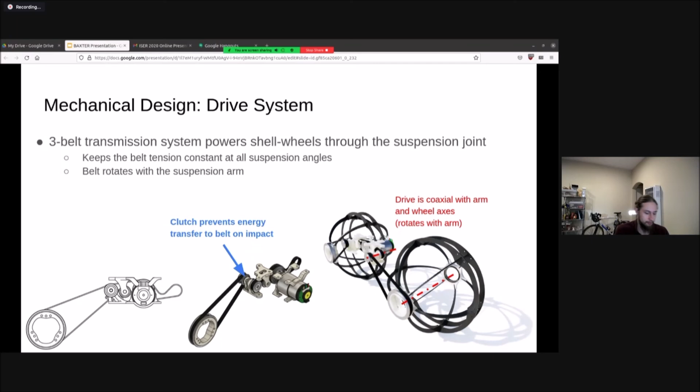The clutch, which I have pointed out in the middle, is designed so that only one wheel in each pair receives power at a time. So it delivers power in only one direction, depending on the direction of motion of the vehicle. The clutch also serves to prevent transmission of impact forces through the belt drive. So when the suspension translates on impact, the clutch will rotate back freely, which will avoid overstretching and damaging the belt. So here we can see a short video of the drive system in action.

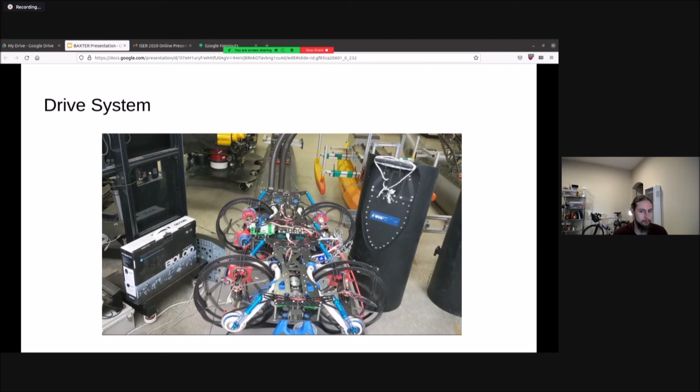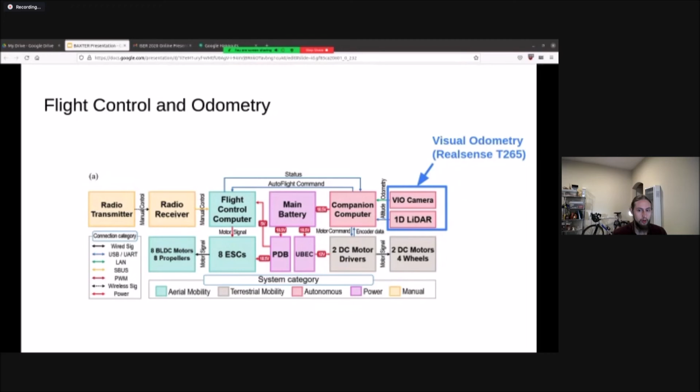Now I'd like to briefly introduce the components of Baxter's control system before I discuss the landing process. On the right, we can see the visual odometry system, which is important to enabling autonomous flight on the system, unlike the prior generation. And this will be important for autonomous landing experiments I will show later. I've also already mentioned the compute system consisting of a Pixhawk flight controller and Jetson companion computer. And these computers respectively control the motors for the aerial and terrestrial mobility modes.

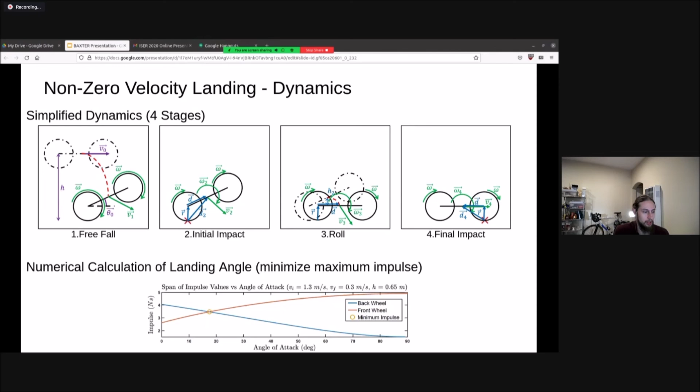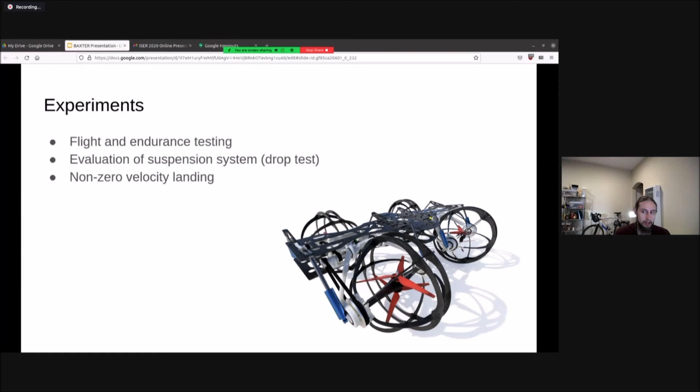Now I would like to show a video of Baxter in flight. We observed some oscillation that you'll be able to see here at about 1 hertz, and we believe this was due to the suspension system. In general, we also had to adopt fairly tight control limits due to some translation of the suspension system while in flight.

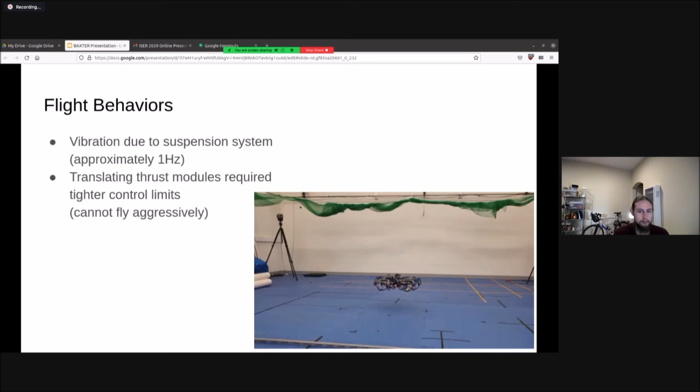Now, one of the benefits of the suspension system on Baxter is resilience to impact. To test this resilience, we dropped the system from increasing heights at its full mass of 4.2 kilograms. Baxter was able to sustain drops of up to 1.3 meters without damage to components, and being able to fly after drops of up to 1.4 meters. Notably, any damage was concentrated on 3D printed parts that could be easily replaced. Also, since the landing experiments will involve free fall, this is an important prerequisite.

So last, we demonstrated the non-zero velocity landing behavior. This behavior relies on both the suspension system to sustain impacts on landing and the autonomy system, including visual odometry for control. Baxter was able to perform this landing behavior, which consisted of a short free fall leading to impact while moving forward simultaneously. And Baxter was able to perform this behavior successfully and repeatedly without damage to its structure and components.

To conclude, Baxter is a hybrid aerial vehicle that carries a non-trivial sensing and autonomy payload while retaining resilience to impacts, particularly during landing. And this is enabled by the novel suspension and belt drive. To take advantage of Baxter's mobility and autonomy, we demonstrated an autonomous non-zero velocity landing behavior, which depends on both odometry for autonomy and the resilient airframe and suspension system during landing.

Mike, can you stop sharing so that we can see? Okay, great. Yeah, I see all the speakers from this session. So one issue which was discussed during the session is the autonomy. So I'd like you to comment on where we are here with aerial robots in terms of the autonomy, and what do you think are the big challenges to overcome. I mean, when I say autonomy, I don't refer only to the autonomy of the battery, because that's a bottleneck just affecting all kinds of such systems, but in terms of the decisional autonomy, in terms of the control. So Andrew, would you like to start?

Sure. I think my research in this area has been actually pretty limited to a small but I think important limitation on autonomy, which is the robot's ability to do its perception and state estimation tasks on board and in perceptually difficult environments. Finding methods that are both adaptable to different environments and lightweight enough, both physically to be a payload for an MAV and in processing terms to be processed on the MAV, have been the principal challenges in my work. But I did specifically select those challenges for my work, so take that for what it's worth.